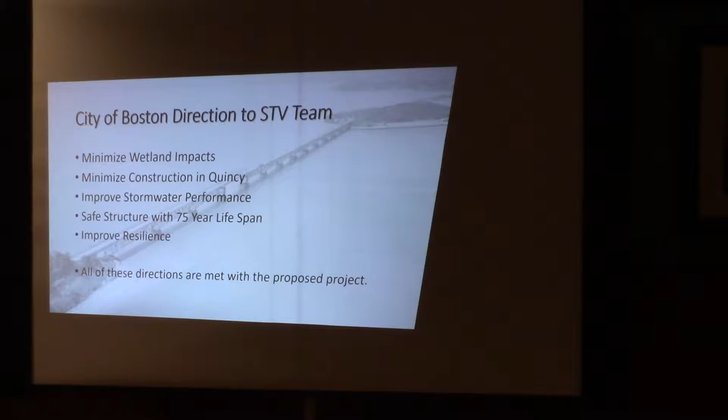So the STV team designed a project that minimizes construction activities that are in Quincy. It provides a new bridge superstructure that has improved stormwater performance relative to the old superstructure, that is going to be safe for 75 years, and is also designed with potential sea level rise and climate adaptation in mind, with higher elevations. We remain confident, as we were when we first presented this to the Commission back in June, that we've met all of these directions.

The superstructure has - we're calling it the same roadway profile. We're using the same piers, and I know that's a subject that has generated an awful lot of interest, and we're looking forward to answering questions that people have. But by using the same piers, we are able to avoid work that is in the water that's going to alter the floor of Boston Harbor.

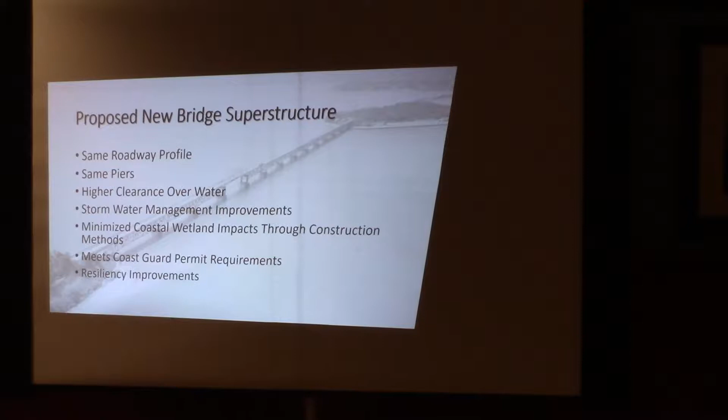The higher clearance, as I said, is to provide climate adaptation and resiliency, stormwater management, and we've also met Coast Guard requirements with respect to the navigation channel, which is on the Boston end of the structure.

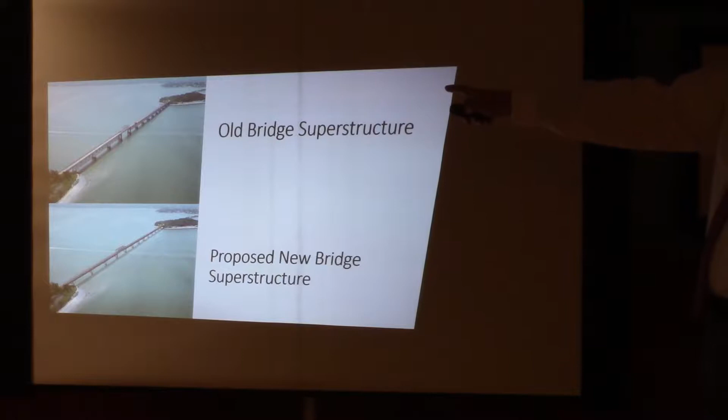The old bridge, people will recall, had a truss, was built about 50 years ago, and as people can see, it had run through its design life and needed to be replaced.

The new proposed superstructure, there's an image down here below, is characterized once again by a truss, the navigation span, and also by new delta frame supports on top of each of the piers.

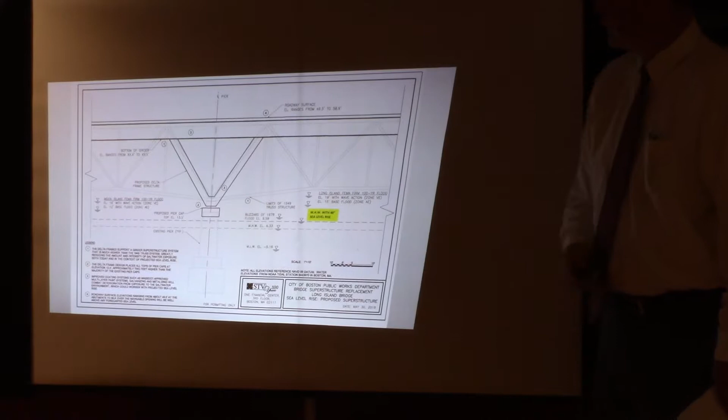This is going to provide a sleeker profile, and once again, the sea level rise is illustrated on this figure, and this shows that the tops of the piers and the road surface itself are elevated relative to the old structure.

With respect to alterations of wetland resource areas or buffers in Quincy on Moon Island, we, as I said, went to great lengths to find a solution that would allow us to minimize temporary or permanent alterations.

They're illustrated on this, which is also in the NOI that was submitted, but down here in the fine print, I regret that it's still fine print even though we're projecting this on the screen here, but the punchline is that what we have proposed is no alteration of land under the ocean. That's a zero, and we continue to stand by that assessment and feel very comfortable in making that assessment.

We have 80 square feet of temporary alteration of coastal beach and land containing shellfish, and that is associated with our proposal to put four pipe piles driven into the coastal beach area to support a temporary trestle, which will facilitate construction of the last span of the bridge. Again, we've minimized the pipe piles that will go in and then be removed with their work.

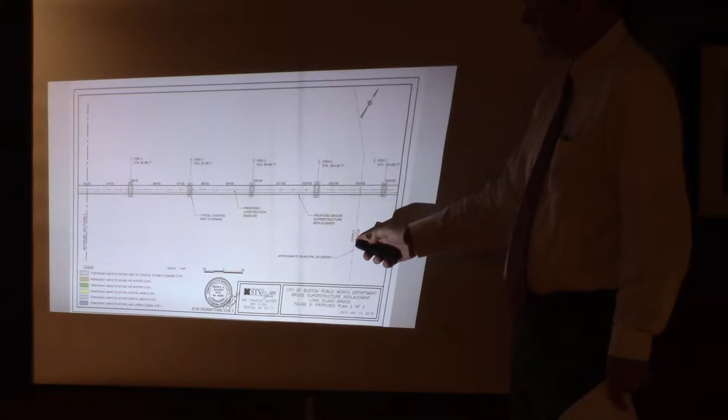And this figure here is the non-intertidal area. This is from the municipal boundary between Quincy and Boston out in the harbor back towards Moon Island. And as you can see, there's no impact in this area that we are proposing.

Once again, we described in the NOI, we've also described in the notice of project change that we submitted to the state, to the MEPA office of the state, that the city is proposing to do repair work to the piers, but the repair work to the piers is going to be in the dry.

It's not going to include cofferdams. It's not going to include activities that are going to alter the floor of the harbor. And through the specifications that will be the basis for the city procuring a contractor to do this work, there will be a requirement that the contractor is not allowed to work in the water and do any activities that impact the floor of the harbor.

He or she is going to be required to use best management practices, structural best management practices, to prevent any debris from being released into the harbor during the repair of the piers.

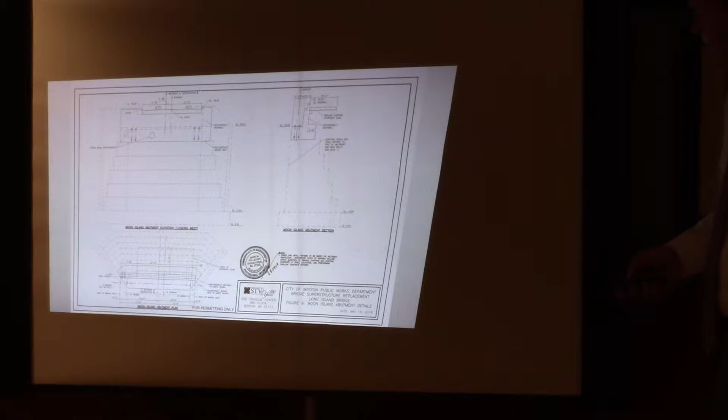So this again is a figure that shows the existing piers, and this shows the repair work that will be proposed. I'll let one of my colleagues speak to the engineering details of that.

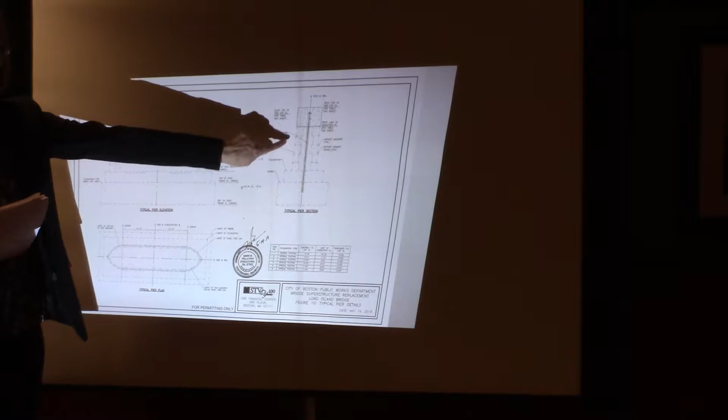You'll see here that we have our proposed limit of demolition. We're taking the top of the pier cap off, installing post-tensioning to strengthen the concrete core of the pier, repointing and repairing the granite facing of the piers, and building a new concrete cap.

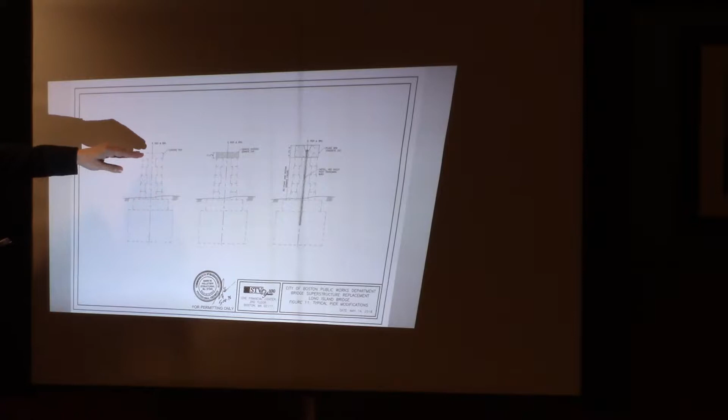This was all included in the notice of intent, but just to clarify everything that's being done, this goes through the staging of what I just described. We take down the top of the existing pier cap, remove the granite from the top, and place a new concrete cap after we have installed these post-tension strengthening rods.

We have included in the NOI a designated area where we would propose for the contractor to be allowed to, during high tide, tie alongside barges to bring equipment over to Moon Island. The concept at this point is that a large piece of equipment, a crane, will be required at this location to facilitate the movement of girders and steel elements of the bridge span into place.

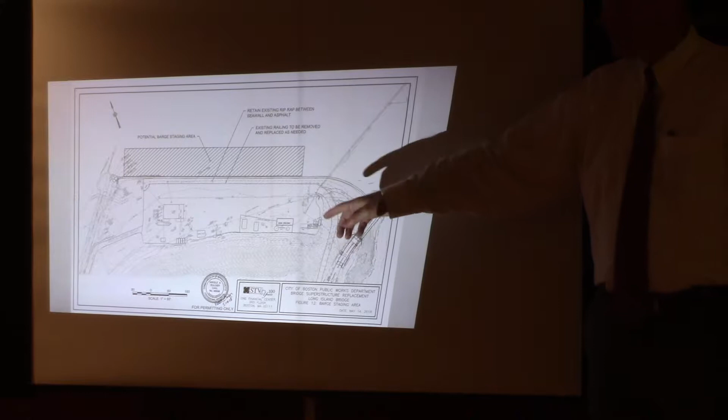We've identified this area as kind of a worst case assessment of where the contractor would be allowed to tie alongside to transship materials or equipment onto the paved parking lot here at the island, and then move it over towards the abutment area, the bridge construction.

We recognize the importance of minimizing the impact on the City of Quincy and minimizing traffic on the city streets of Quincy. We've prepared and presented an approach here that we feel pretty comfortable minimizes that particular potential impact.

The final point I'll make on this, because this is something else that's been raised as a question at various times over the course of the summer, is through the specifications the City of Boston is going to stipulate that the contractor selected to do the work is not allowed to bottom out his barges at that location. I'll say contractors, because the barges they own are valuable pieces of equipment, and they're not really inclined to allow their barges to bottom out in any event because they're concerned about the risk of damage to equipment.

So that's the presentation that we provided last spring. Again, very minor coastal wetland alterations have been proposed in this NOI. We stand by the impact numbers that we presented back in May and initially presented to you in this presentation on June 6th. Once again, no alteration of land under the ocean is proposed in this NOI.

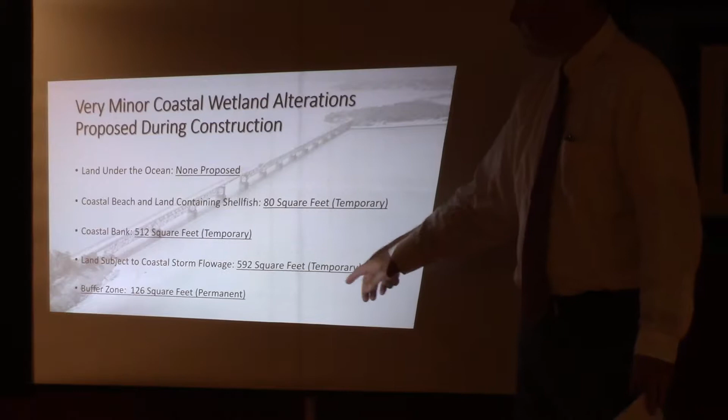Once again, we've in effect double counted 592 square feet of land subject to coastal storm flowage, which is a combination of these two numbers here, because they happen to correspond to land subject to coastal storm flowage.

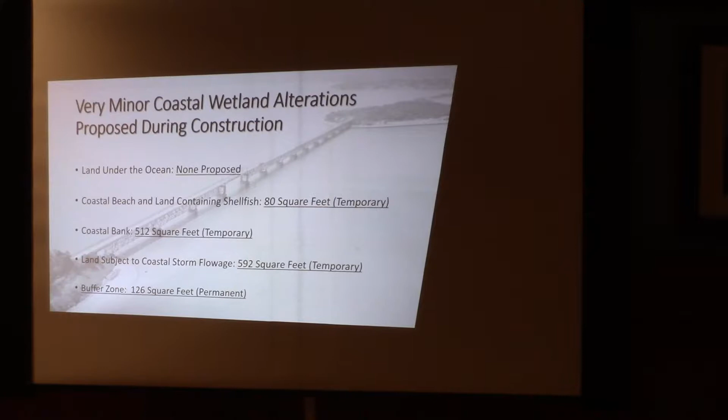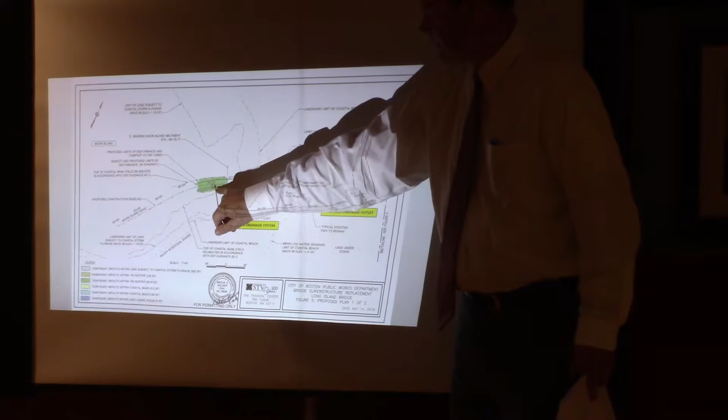And there is a small area where we're proposing this permanent buffer zone alteration up at the abutment area, the approach roadway, which is to improve the geometry of the approach roadway. It's outside of the resource area, in this buffer zone area—you can't even really see it, but it's a little sliver right there because they need to provide safe geometry for two lanes to access the roadway. The pavement needs to be just a touch wider on one side.

Once again, it's buffer zone alterations, and that was intentional. We did everything we could to avoid resource area alterations. So I think that's all the presentation we provided back in June.

And again, as Mr. Osgood said, we're very happy to answer questions. We are hopeful that by the conclusion of tonight's hearing, the members of the commission may be inclined to close the hearing, and we can move forward one way or the other.

I'll just note, I did see in the MEPA file, I raised questions about alternatives analysis, and you did provide some in the MEPA. Not everybody will agree with that, but I did see the no build and ferry service alternatives addressed. Any other questions?

Yes, the most recent one. We'll address that in a minute. He is aware, okay.

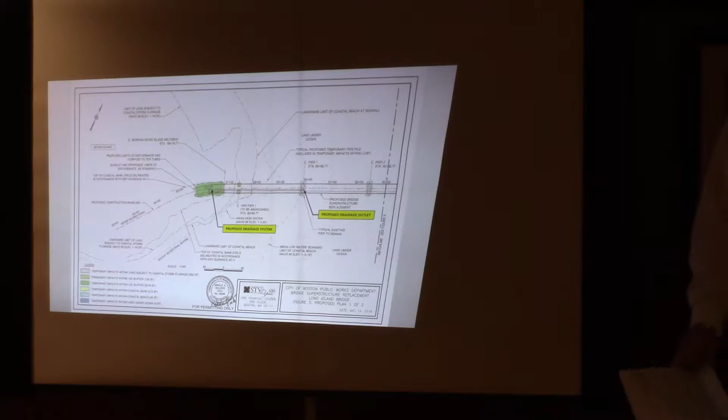I think the other concern I had was the pier repair work. From what I remember, the photographs from June showed there is some deterioration below the water surface, and you're not going to do any work below the water surface. How are you going to address that?

I'll refer that to our colleagues on the team. There will be repair work performed below the water level, but there are structures that can be attached to the pier from the top, a containment structure, so most of that work would be performed at low tide. It's below what we'd call a mean high water line, but some work could be performed in the dry, either by pumping out something attached to the pier itself, not touching the seafloor, or just with the regular tidal fluctuations. There's a large tidal fluctuation out there, as I'm sure you know.

But some of the debris that's in the pointing now, will that end up on the seafloor? No, they'll be required to build a containment system around the pier, attached to the pier, so that the debris would be captured. That, it should be 100%. I would recommend that it be a condition. That's something the commission is likely concerned about, but that's the way the contract documents are being written as well. And that's a temporary containment, not a permanent one? Yes, this would be a temporary construction-related containment system. What's that containment made of? There are different alternatives for that, so we'd consider that the contractor's means and methods, but there are various systems available for that type of thing.

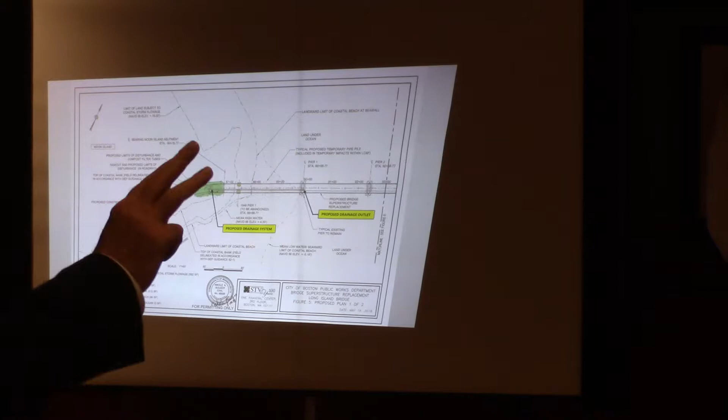Although I did introduce myself way back on June 6th, I'd like to say hello again. My name is John Shea. I'm an environmental lawyer with the firm of Mackie Shea in Boston. I have been practicing wetland law for 36 years, both permitting, appeals, enforcement, and teaching. I've mostly been an applicant and commissioner's lawyer reviewing projects from Truro out to Lenox and everywhere in between. I was chair of a conservation commission for 8 years, so I understand the challenges of the many meetings and complex projects you have to deal with. I'm pleased to be working with the excellent engineers and scientists at Tighe and Bond.

And with extremely knowledgeable city staff who provide a historic perspective on how other projects have been handled, which would be lost if they weren't involved in the process.

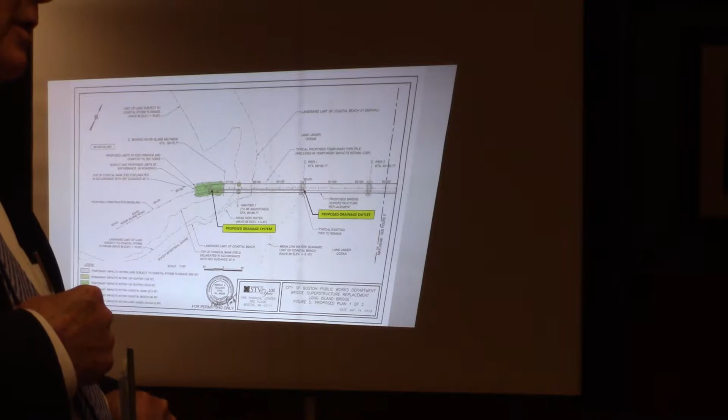Since June 6th, when I last addressed the commission, and when Tighe and Bond and the commission demanded that the Boston Public Works Department submit additional information to you, the city has submitted a package on July 13th, which Tighe and Bond critiqued in its August 21st memo. Dave Murphy will address that in a little more detail.

And the commission also received in yesterday's mail an August 28th letter from the Boston Public Works Department with an attachment. Boston also submitted an evaluation of the condition of the existing concrete piers by Dr. David Gress, and Duncan Malore from Tighe and Bond will summarize the salient points in that memo.

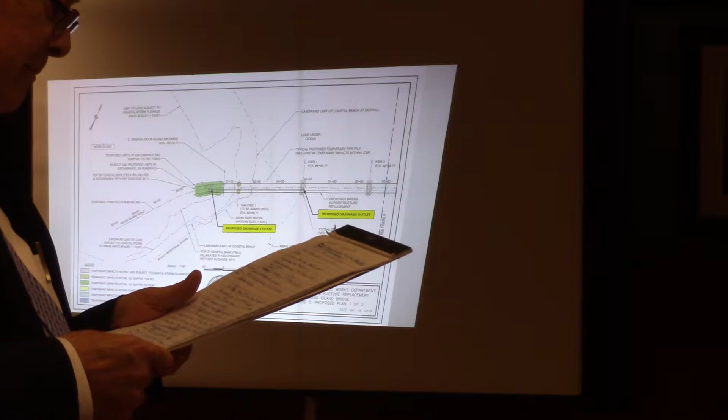I was surprised to hear that there was a September 5th response to that memo submitted. The city's team wasn't provided a copy of that, so we're not in a position to comment on that. But before I turn it over to Dave and Duncan, I feel compelled to respond to the city's repetitive mantra.

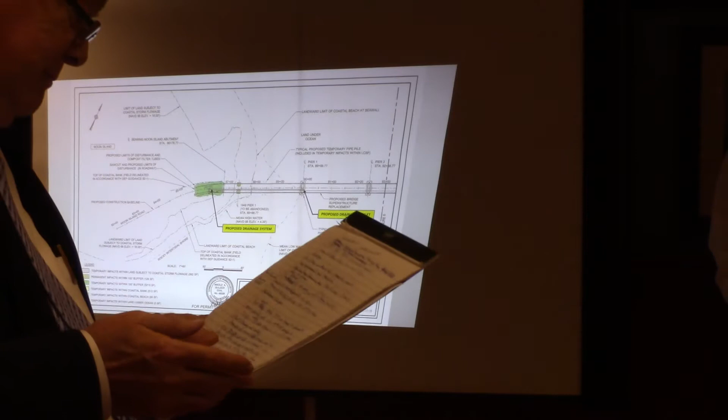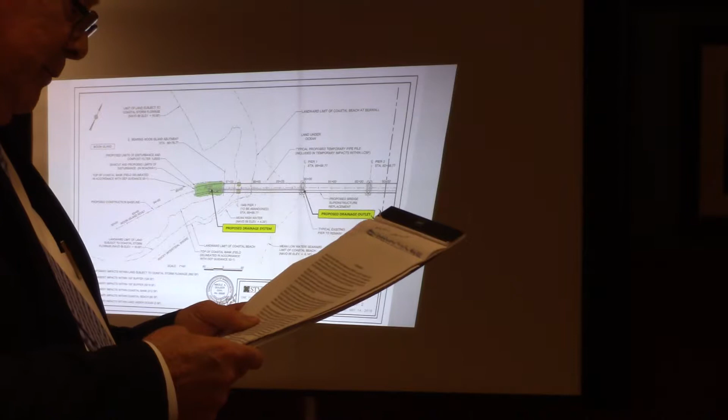In its July 13th letter, Boston claims the Quincy Conservation Commission has no jurisdiction to demand information, which, by the way, Boston provided most of under protest. And its further audacious claim that the Quincy Conservation Commission should not exercise its authority under its ordinance to require, and I quote, information and plans as are deemed necessary by the commission to describe the proposed activities and their effects on the environment. Boston doesn't believe you have the authority to demand that sort of information. That's outrageous.

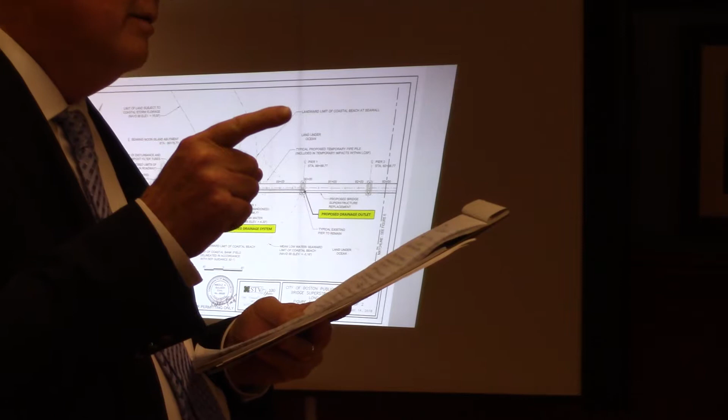The commission should reject the claims that you can't demand additional information that will allow you to fully assess the likely impacts to the wetland resource areas if the piers require more repair, heck, even replacement, if the concrete is not as sound as claimed, without supporting data for that claim.

And Duncan will address that technical memo that addresses that work. You're also entitled to determine what mitigation measures are appropriate and necessary to protect wetland resource areas and wetland interests from the greater repair or replacement of the piers.

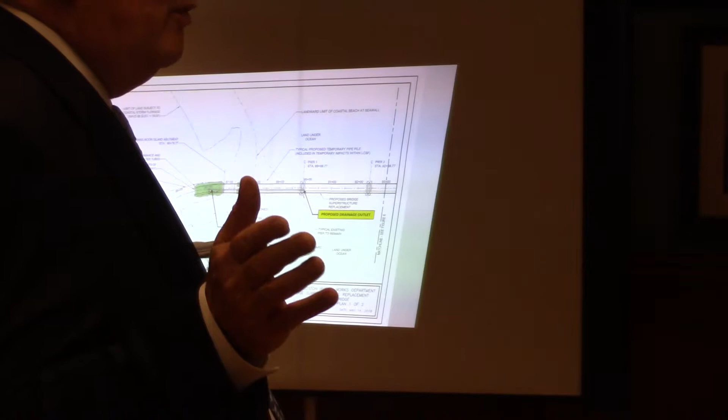The low impact numbers that they're showing you are illusory. They're deliberately low, and they don't acknowledge the fact that there's a lot of work to do on those piers to support the structure that they want to put on it.

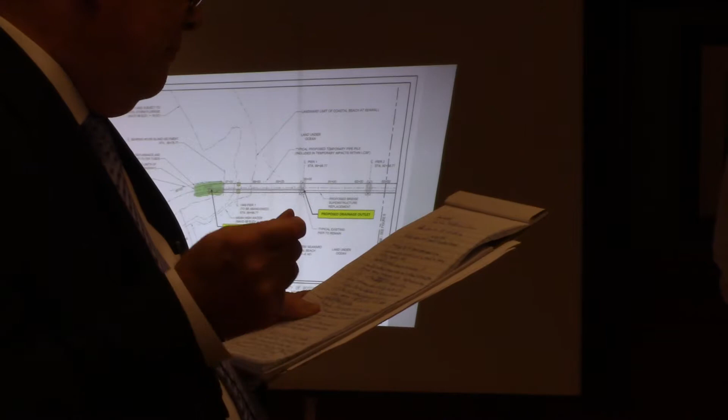In their memo, they criticize your administration of your own wetland ordinance. There's nothing inappropriate with you administering your ordinance more strictly than the Wetlands Protection Act. They don't want you to, because you have more authority. You can be more strict.

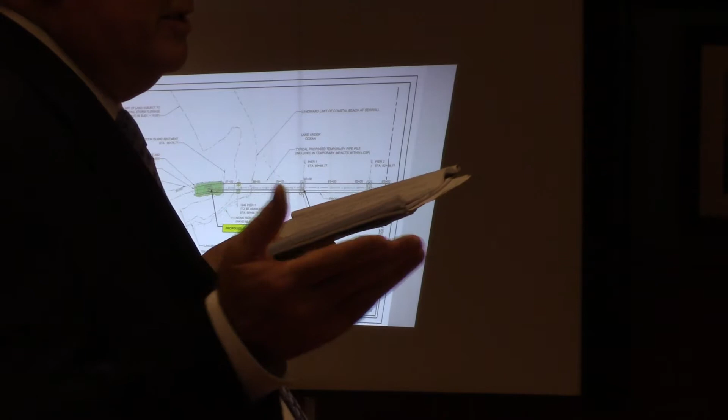In fact, that was the purpose of home rule wetlands laws. Cities and towns were tired of DEP overturning their decisions and second-guessing the judgments made under the Wetlands Protection Act. So 231 cities and towns in Massachusetts either have bylaws or ordinances. You have them. You're entitled to exercise that special authority you have under the ordinance, irrespective of the claim of the city of Boston. Your purview of this project is not limited to the Wetlands Protection Act as they claim.

I thought what was most amazing in the August 28th memo was the admission that the plans before you are going to be superseded as, quote, advanced design and construction plans are prepared. How can you approve a project without seeing the final plans for the project? Trust us, it'll be fine. You should not trust that statement. You should see the final plans now, not later.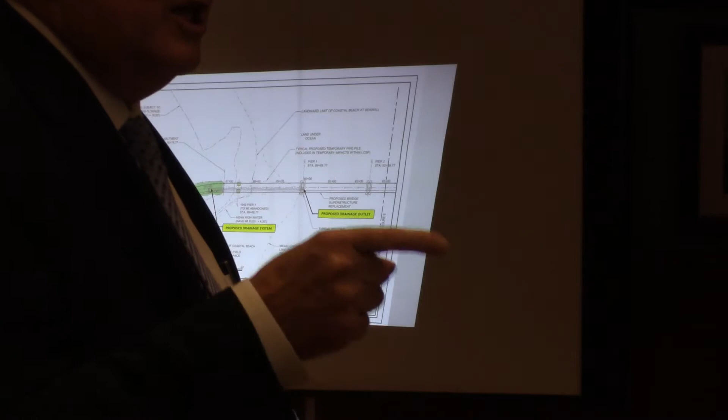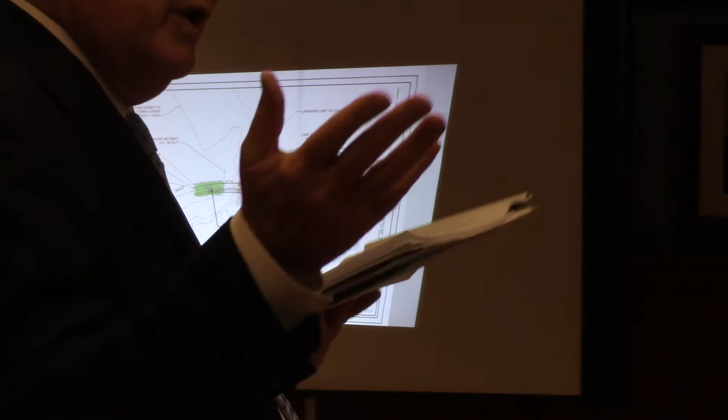The best management practices are exactly what this commission needs to review. You cannot legally defer the appropriateness of best management practices to the City of Boston's contractor. That's your job, not the contractor being paid for by Boston. You need to know, what are these BMPs? What's going to be proposed? Are they going to work? How are they going to work? Should we approve them? Should we require something more? That's your job, not a contractor's job.

I think the audacity of Boston is taken to a new low when, in the package of information they submitted to you, they submitted the Boston Conservation Commission's approval order conditions.

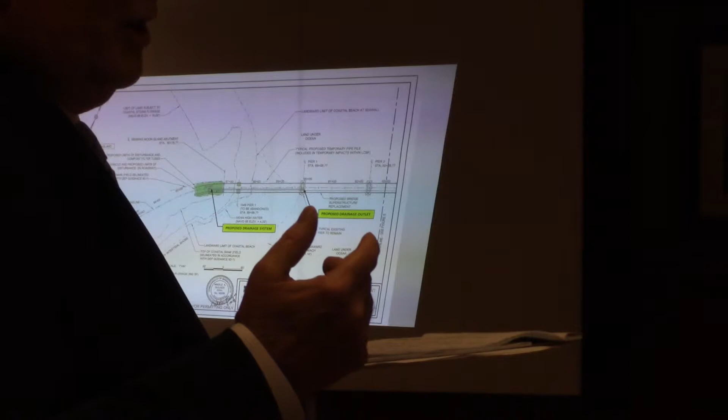I'm going to remind you back on June 6th that the Boston Public Works Department was playing on home turf before the Boston Conservation Commission with a local umpire. In fact, there was a pre-negotiated order of conditions even before the hearing was open, and it was agreed to even before the Tighe & Bond memo that was submitted to the Conservation Commission, the ink had a chance to dry.

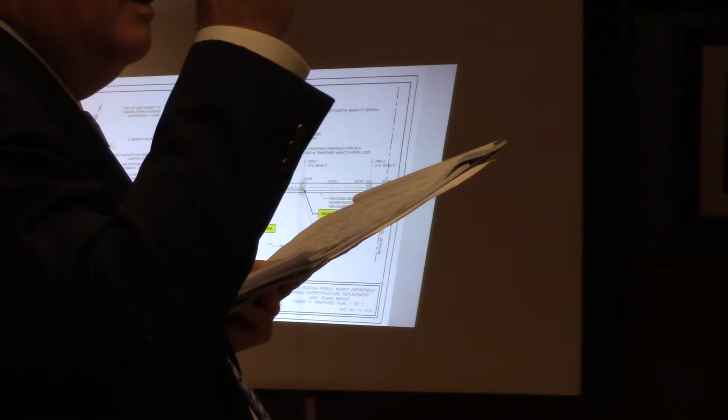There was one brave commissioner, Alice Richmond, one of the finest trial lawyers that I've met in my career. And she said, I cannot, in good conscience, vote to approve this project when I haven't even had time to review the Tighe & Bond memo.

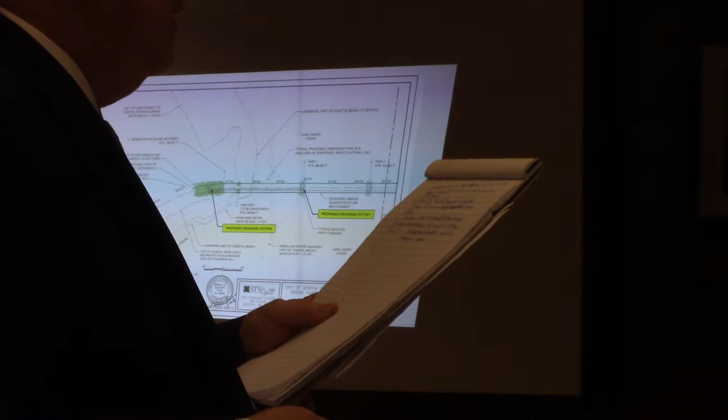But of course, right now, they submitted that order to you, and I gotta tell you, that order's a nullity. It's been appealed to DEP. It means nothing. Shouldn't mean anything to you. You're not bound to follow what the home team did for the home team.

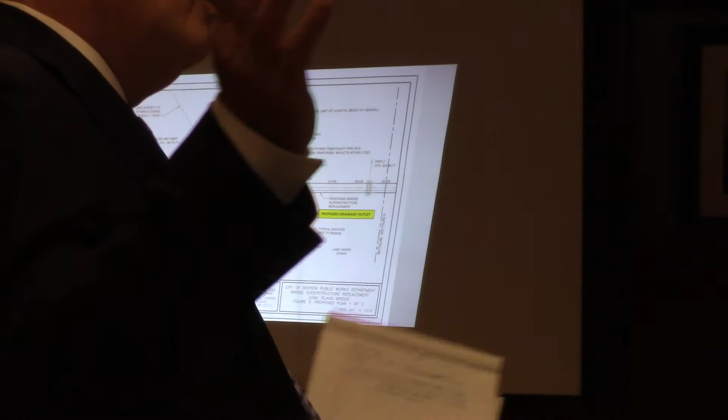So I ask you, after you hear the presentation of Tighe & Bond, to reject this trust-us approach to permitting. If there's a problem, we'll come back before you. You guys ever tried to fix something after it's gone to hell in a handbasket? It ain't easy. People come in kicking and screaming with all sorts of excuses.

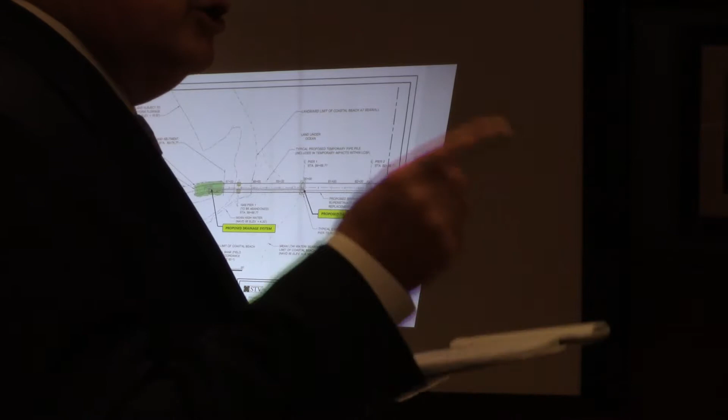That shouldn't fall on you. You shouldn't trust them, and you shouldn't trust an unknown general contractor who's going to come up with methods and means and best management practices. Those are for you to decide whether you like them or not. I ask you to demand the show-me approach before you even consider granting an approval of this project.

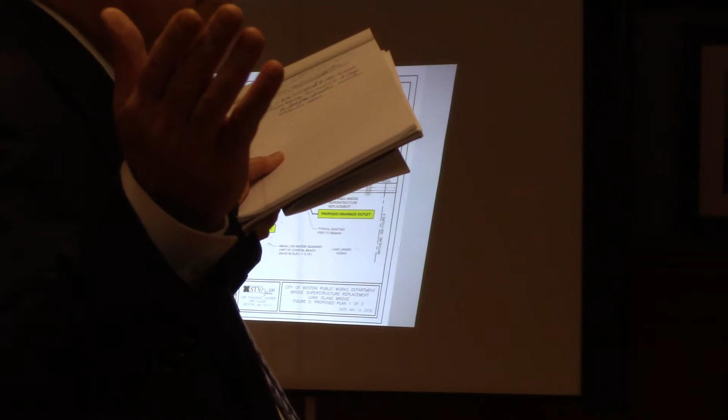However, if the Boston Public Works Department says, this is it, we're not giving you any more information, they refuse to show any more cards, and they want you to close the hearing, do it. And vote to deny the project for failure to provide requested information and for other substantive reasons.

So with that, Dave? If I may, let me just make a correction here. I realize I printed off today a letter from the city, but it was an earlier letter. I don't think you have responded to this, to the September 3rd. Have you? No, there was no September 5th response. No, I printed it off September 5th, so that was. Okay, so there wasn't. There was not yet a response. Right. Thank you.

Thank you very much. My name is David Murphy. I'm a consultant for the city of Quincy, Tighe and Bond, I'm the principal. We have submitted two memos to the commission, one dated June 6th and one dated August 21st. They were very extensive memos. Tonight it doesn't make any sense to go through those in detail. You have those in front of you, they stand on their own.

It's important. I just want to touch on two issues, just to highlight some of them. Attorney Shea has just mentioned one of them: the BMPs. Throughout the document and through the August 28th submittal that the city received yesterday, I believe, it states that the contractor will be responsible, as they get closer to the final design, they'll pass it on to the contractor to submit means and methods for the BMPs.

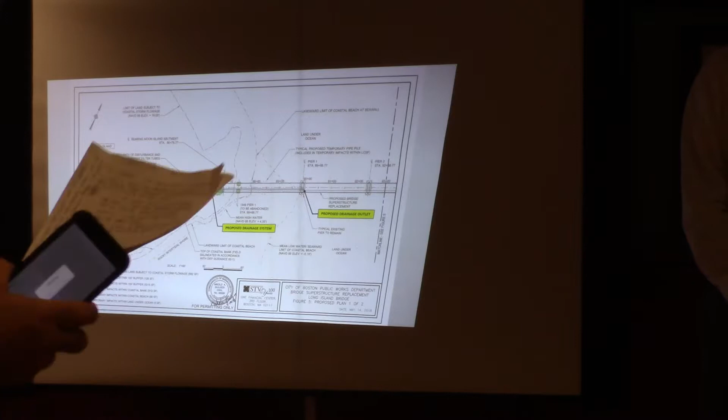The Boston Conservation Commission itself, on their webpage, has a document, and I'll just read a quick paragraph. The City of Boston currently relies on the 2013 report of the Massachusetts Office of Coastal Zone Management Sea Level Rise, Understanding and Applying Trends, blah, blah.

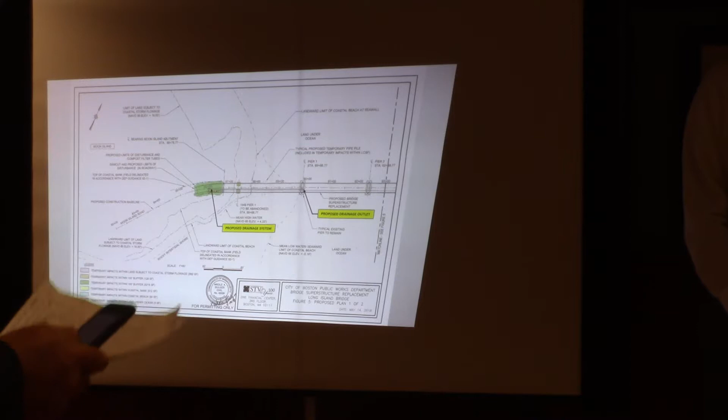The Commission recommends that applicants prepare for at least the CZM intermediate high scenario for most projects, and the highest scenario for critical facilities and infrastructure. We have to believe that this is critical infrastructure to get over to Long Island. The sea level rise that the Boston Conservation Commission recommends that they design for is 6 feet. They've designed for 3 feet. So the bearings of the base of the bridge will be submerged in water, which is not an acceptable design practice.

Tighe and Bond remains concerned, as your consultants, that they've not properly addressed and quantified all the impacts to the resource areas, particularly the piers. So with that, I'd like to introduce Duncan Mello from our firm to go through Dr. Gress's conclusions in his reports that was just given to the city several days ago.

Duncan Mello, Principal Coastal Engineer with Tighe and Bond. I've got over 30 years experience in evaluating waterfront structures, including granite and concrete. David Gress was a member of our team in helping to review the documents that were provided as part of the submission. One of those was a petrographic analysis that was performed on the concrete cores that were taken out of the piers.

Dr. Gress reviewed those reports. There's an Appendix E that was provided with that petrographic analysis. He went through that and came up with different conclusions from what they found in that report.

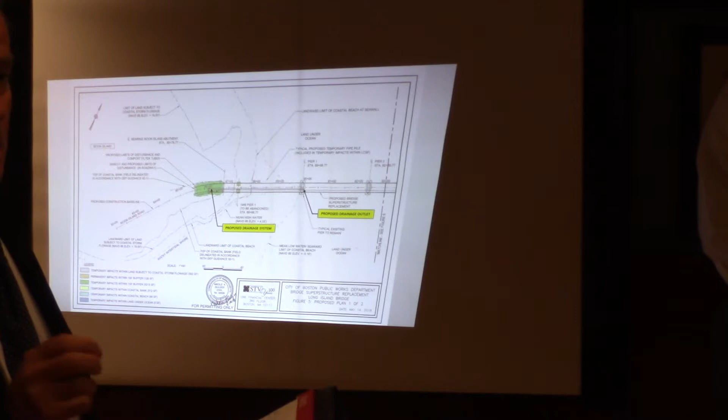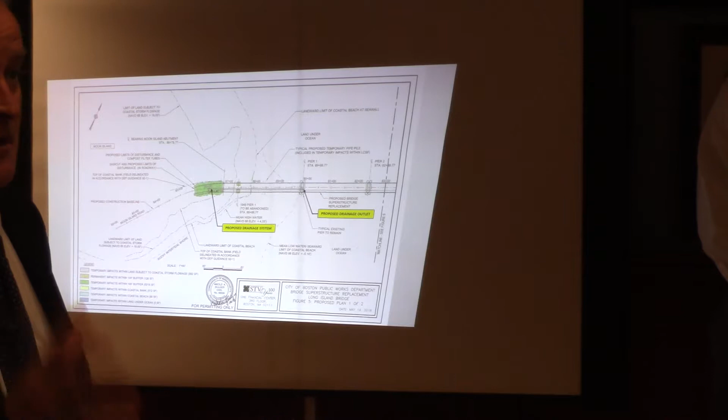One thing he emphasized: the concrete is lacking air entrainment, which are small bubbles that are entrained into modern concrete to give the water in the concrete somewhere to go when it freezes. By not having that, you run the risk of more freeze-thaw damage. In other words, every time the concrete goes through freeze-thaw cycles, you'll get spalling and cracking of the concrete.

They also looked in that study at the chloride concentration, chloride ions in the concrete, and found that they were significantly higher than the levels that would induce corrosion in any steel embedded in that concrete. So the rebar that's embedded in that concrete, and any post-tensioning they put in, would all be subject to corrosion due to the chlorides that have already ingressed into that concrete.

He also reviewed the photographs included in that Appendix E and said that they clearly indicate visually ASR and freeze-thaw damage that's occurred in that concrete. Looking at the photographs of the cores, he emphasized the fact that the cores appear to be more fractured closer to the granite, and more toward the outside of the concrete.

A lot of the testing was done on the portion of the concrete cores taken further on the interior of the pier. It's anticipated that this will be a progressive type of deterioration to the concrete. That deterioration is going to start from the outside, where it's exposed to the water and freeze-thaw most heavily, and progress inward, accelerating over time.

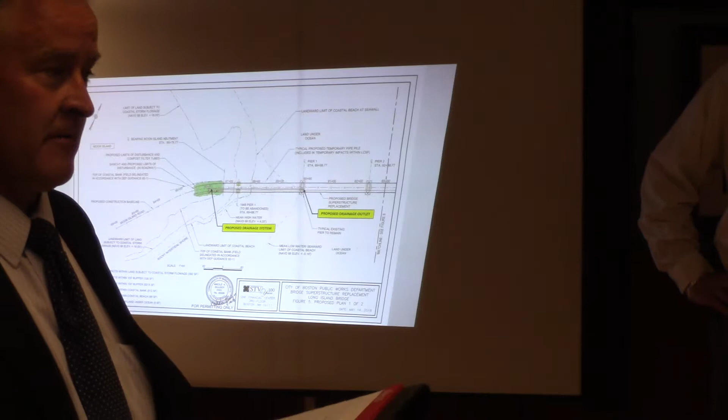Dr. Gress's opinion was that the cost-effective life expectancy of these piers has already expired. They're approximately 70 years old. The city of Boston is looking to get another 75 years out of them, so on the order of a 150-year life they're expecting to get out of this concrete.

It's got both the alkali-silica reaction, which is essentially like a cancer of concrete. It's typically caused by the reactive aggregates, the stones used in the concrete. That's clearly showing up in the photographs in the Appendix E report, with what they call the reaction rings around the aggregate. What happens is when the ASR reaction with that aggregate is exposed to moisture, it starts to expand the concrete, and so you get cracking of the concrete.

The more cracking you get, the more water intrusion you get, and it progresses its way into the concrete of the bridge pier. This is a significant concern, and it's his basis for the opinion that the concrete has already reached the end of its life expectancy.

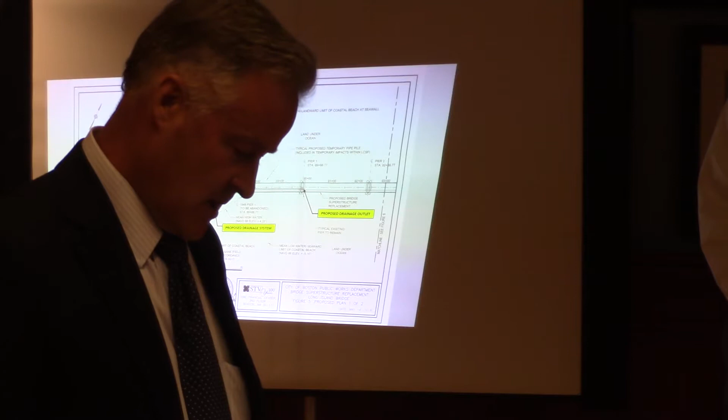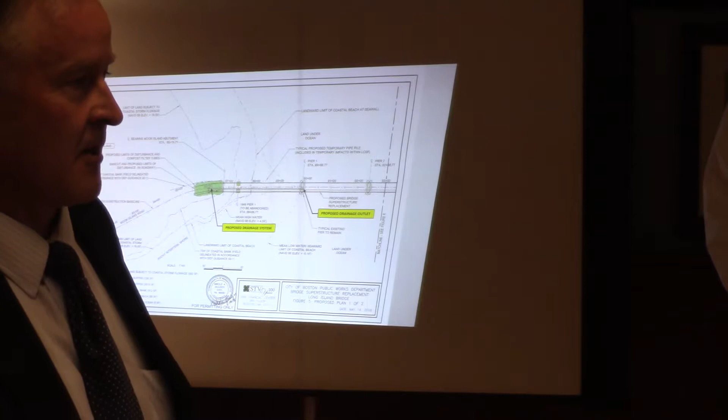He did note that the ASR and the freeze-thaw damage is expected to actually accelerate over time. Again, with that cracking and the ability of water to get inside the concrete of the pier, that reaction, the cracking, the expansion of the concrete is expected to accelerate over time. So you can't just make a linear projection because it's already survived 70 years, that it will last another 75.

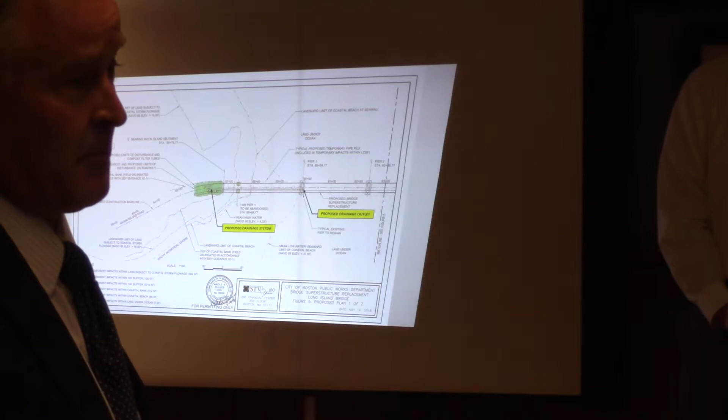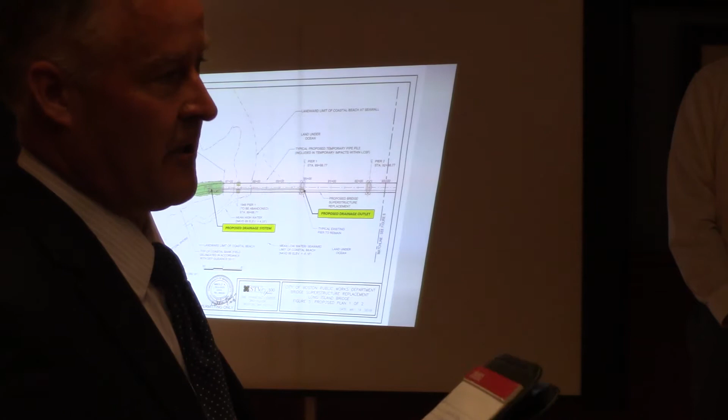At the end of that report, Dr. Gress does make some recommendations for additional testing that he thinks are important, for those piers' reuse, to see what kind of quality that concrete is and whether or not his opinions on this review of the Appendix E report are founded. He recommends more coring of the concrete, more extensive around the pier and in greater depth, and also non-destructive testing to look at delaminations and cracks occurring inside the concrete. So those would be the tests he recommends be done on the piers to make sure they can be reused for the new structure.

Would you like us to respond to that now, or take other testimony? What's your preference? Is there any other testimony from city consultants?

Let's get a response to that, and then we'll ask. I'm assuming that we'll see from our law department who will address some of the jurisdictional issues, and Nicole Bulger will come back on sea level rise and the pier structures.

Thank you, Chief. My name is Sammy Nabolsi, I'm with the City of Boston Law Department, and I just want to address a couple of points that were brought up by John Shea. I won't repeat anything we have in the documents. First I want to clarify the response that the city made.

That was just not a correct reading of the response. If you look, I'll point you to the exact spots, you can read it for yourselves, but it's the August 28th letter, and I think John is pointing at the last paragraph on page 1 of attachment A, where the city said, in addition, we just assert that it is premature to request the advanced design and construction phase means and methods information identified in the memo. And then we actually say that the Quincy Wetlands Protection Ordinance itself only requires information and plans as are deemed necessary by the commission. So we're not telling you that you do not have the ability to request information and plans. We're telling you that the local wetlands ordinance requires us, upon request of the commission, to provide you the plans as we propose the work.

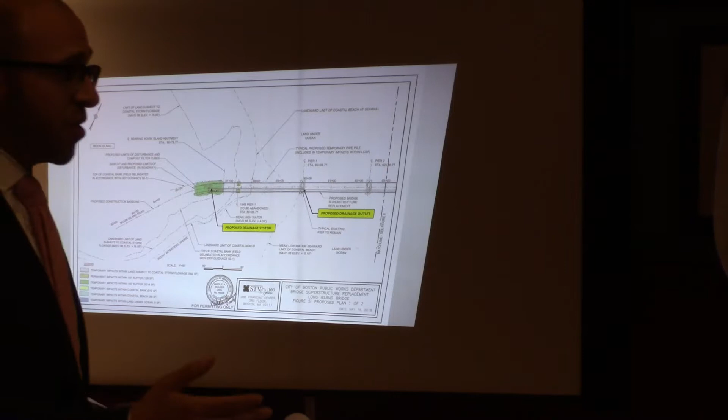The city is not trying to hide the ball or keep anything away from the commission. The fact of the matter is we don't have final plans yet. Why? It's not so that we're asking the Quincy Conservation Commission and the Boston Conservation Commission to rely on our contractor, but we just know, as is the ordinary course in permitting, that as we go to the conservation commissions, as we go through the state permitting procedures, and even here as we go through Coast Guard and Department of Army approvals, there will be additional conditions attached.

And until we know what all the requirements are of the different permitting authorities, then we can prepare a spec sheet and say, hey contractor, not only are these our requirements, but these are also the requirements of the Quincy Conservation Commission in the City of Quincy, the requirements of the Boston Conservation Commission, the requirements of the MEPA office, the requirements of the Department of Environmental Protection, the requirements of Coastal Zone Management, the requirements of Coast Guard, so on and so forth, all of the agencies that we are proposing and showing this project to. And so that's why we don't have final plans for you today, because what you do here today dictates our final plans. And we are happy to provide those to you when we have them.

In fact, one suggestion I would make, and this is what we did with Boston, we're happy to do it here, is that the City of Quincy, as a condition in the order of conditions, require that before the city begins work, we provide the commission with all final plans and designs. And if the commission sees that there's been a change or alteration to an impact area, or our impact areas have increased from what is originally proposed, then yes, we need to appear before the Quincy Conservation Commission on basically what is an amended order of conditions. And we recognize that, and we're prepared to add that to the order of conditions if need be.

The other thing I'll say is that pointing to the impacts that we identified here, it's not, but you have in your presentations, it's actually correct. I agree with John, those are deliberately low. The reason they're deliberately low is because we deliberately designed a project to minimize environmental impacts. Those are accurate numbers. It may be the case that if you add the square footage of the work we're doing on the piers above the water and in the dry, technically there's an increase to square footage.

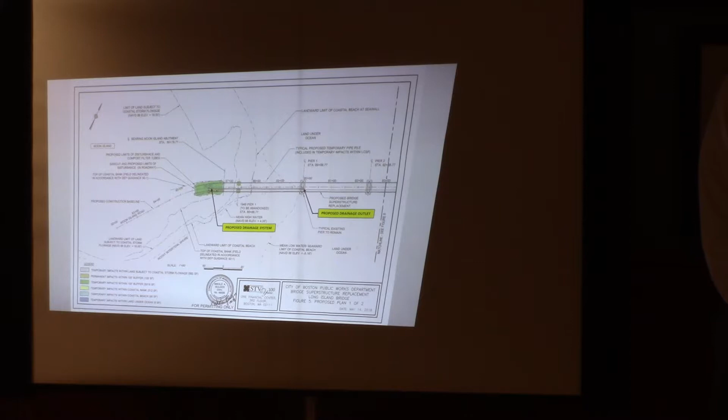And so now I'm going to turn over to Nicole Bulger, who will talk a little bit about the information that we received, I believe, today, and then also address the sea level rise issue as well.

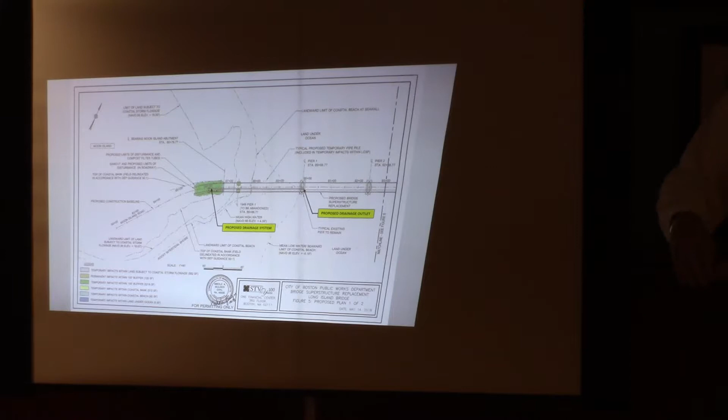I just wanted to quickly touch on the sea level rise question. I know, right, we've all seen how many numbers there are out there for sea level rise forecasts and what percentages. And this actually was discussed, it was discussed with the Boston Conservation Commission as well. It's a very important issue to them. So what we show on this figure is a 40-inch sea level rise.

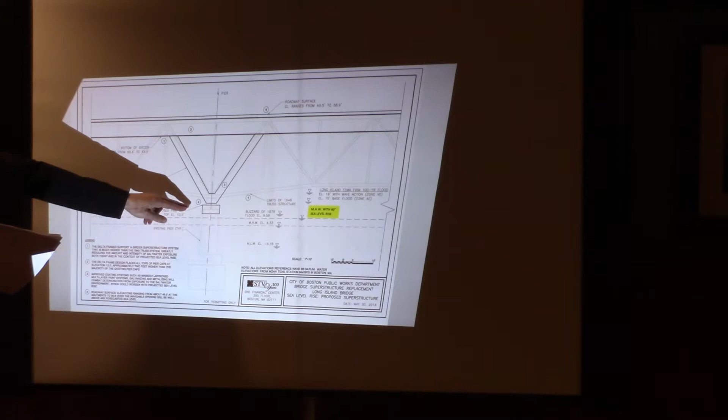If you look at a 72-inch sea level rise, what you see is that this is our roadway elevation. So 40 inches is what's shown here between the existing mean-high water and what would be proposed. That's our 40 inches. So if we double that, you see that really our bearings and our bridge deck are still above that elevation. So it's not something that's going to actually be flooding this roadway and blocking access to critical infrastructure.

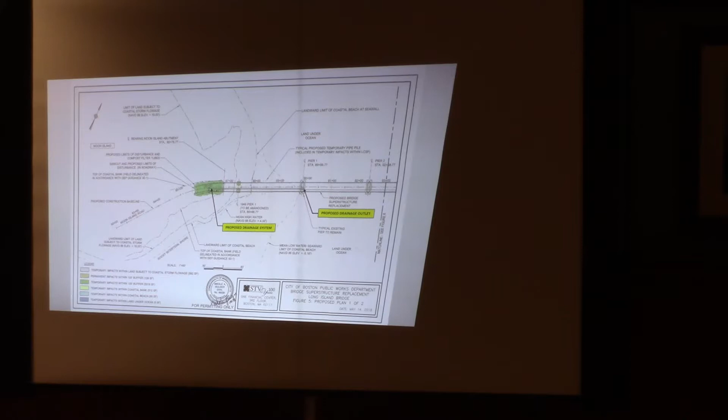And then related to the, I'll take this back. You just heard a lot about the concrete report that we all recently received with an explanation on ASR and chlorides. I think one of the most important points from our perspective is related to the purview of the person who is offering that report and the fact that the design that we described to you for the piers was not included in that. So the city has reviewed the report and specifically the comments related to the structural integrity of the substructures. It should be noted that bridge piers of this age and older are regularly kept in service and rehabilitated for reuse in the Boston area, for example, on Summer Street, and throughout the country.

The items in the report that have merit are addressed by the extensive testing program already performed and by the city's proposed design as presented in the notice of intent filing. Although apparently not reviewed by the report author, the design as presented includes rebuilding and repairing existing abutments, removing existing exposed concrete on piers, repointing and repairing pier granite facing, installing post-tension strengthening bars within the substructure cores, and placing new reinforced concrete pier caps.

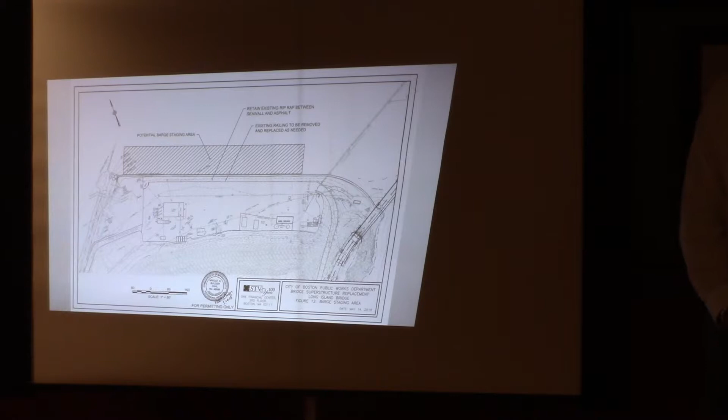The proposed modifications will be in accordance with current codes and standards applicable to bridge design and rehabilitation, and the rehabilitated substructures will serve the community for the proposed 75-year design. And we actually have, at the end of the presentation, we went over these back in June. Other relevant projects, bridges are rehabilitated, substructures are rehabilitated around the country and in this area frequently.

Any other comments? Yeah, it's just a brief statement.

Tighe & Bond never said that the piers were resource areas. They're structures within and above resource areas. That was the point in their memo.

And as to the footprint, way back when, probably June 6th, we explained that the more usual construction methodology around these piers, especially if significant repairs or replacements are needed, was the use of coffer dams. You guys know about coffer dams, you can see them all. Instead, they want to hang bags off the side to catch debris.

The reason we say these numbers are not accurate is that if you take the standard coffer dam design around the circumference of these piers to allow dewatering and to allow the repair to depth, there will be a greater impact to wetland resource areas and to land under water.

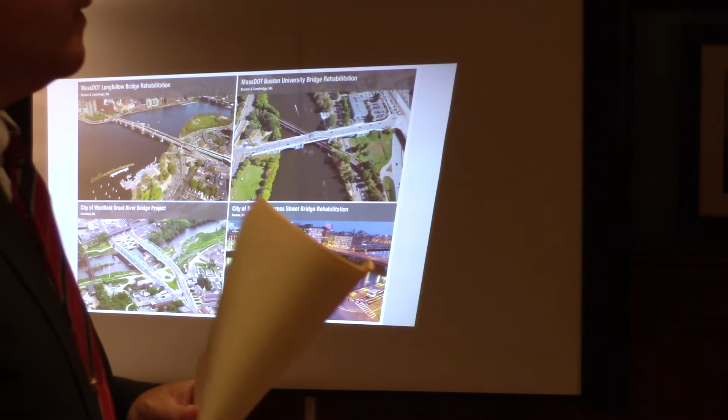Testimony. Go ahead. Good evening. My name's Bill Harris. I'm the Ward 6 City Councilor, and I represent the people who are going to be directly affected if this project goes through.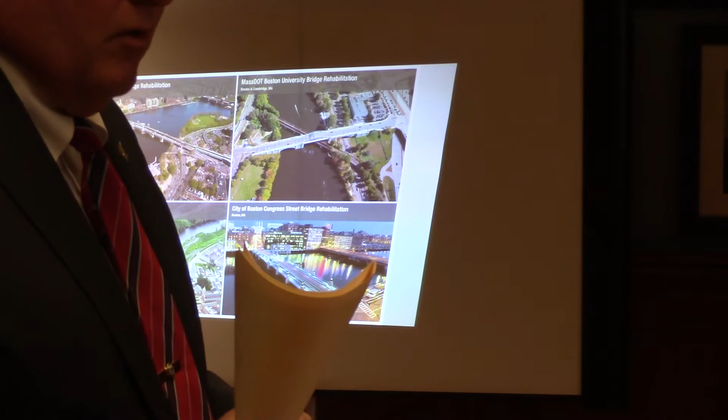I'm really going to make a mistake because I'm going to go off script. I usually prepare myself, but I heard some things tonight that kind of disturbed me. The attorney, I'm sorry I don't know her name, used the phrase, hide the ball. And then the representative for the city also mentioned that there was going to be a recovery center.

So what winds up happening is when someone like myself and other members of government go up against a city like Boston, who's not following the guidelines of what our city does. But I just recently found out that Boston isn't even following their own guidelines when it comes to community meetings and the community that some of the folks represent. They're ignoring what the people are saying.

They don't care about the folks here. They want to use a word, recovery center, and if we go against it, we look like bad guys. My God, we need more recovery centers throughout this country, throughout our city, throughout Boston. They could have recovery centers right now going on. They could have a ferry right now going right out.

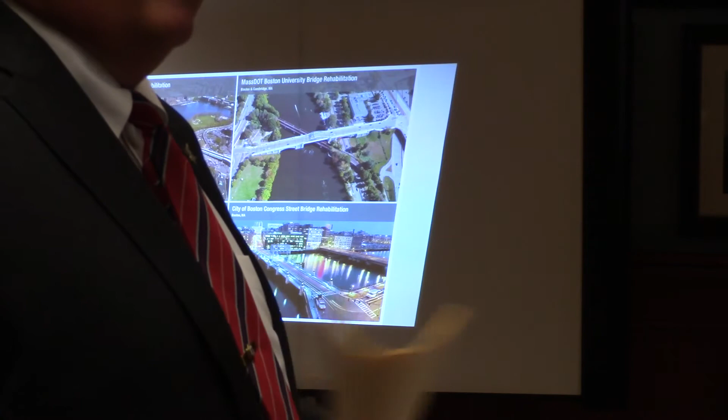I went out to dinner at Spectacle Island. It was wonderful. They boated out 150 people, gave them a clam bake. We had a clam bake, and we were home in 2 hours. So to throw something at a community without telling us what's going to be there, without showing us the plans of what's there, without following what procedures we go through.

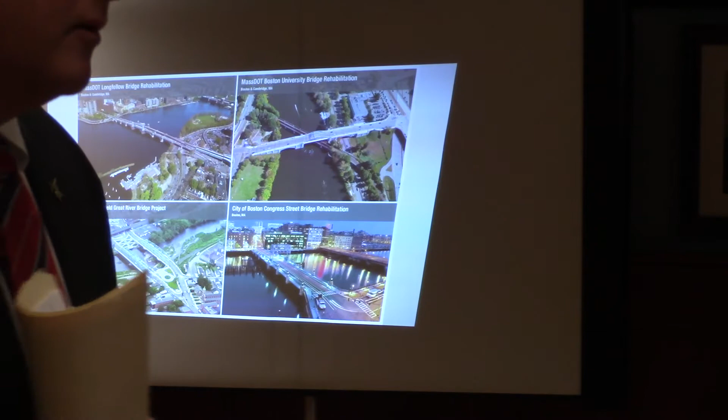Now, I'm going to have some work done on my house. I'm going to have to come possibly in front of you folks, right? That's the rules. We follow the rules. We have community meetings when projects, this is community meetings with this size project.

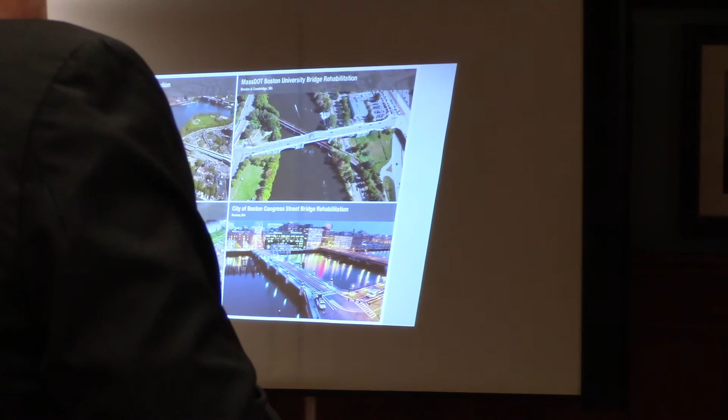And for us being the people of my ward, and not only my ward, the city of Quincy, which will be affected. Not only the city of Quincy, it'll affect the traffic going all the way from Hull over to Boston, which I drive in each day. So, hide the ball, folks, they've hid the ball. And they haven't followed the procedures.

I've written a letter, I got the same response. So I respectfully hope that you folks hear what our attorneys and Tighe & Bond have said, and of course the report, the Gress report, makes it clear.

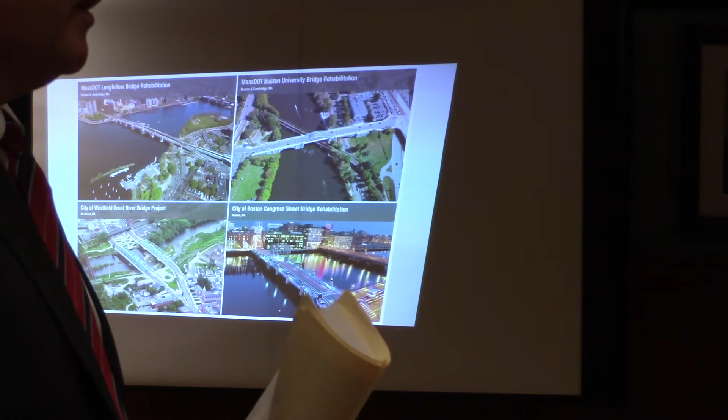And I'm now going to even get myself in more trouble. There's a road which leads, I'd love to see it, which leads, Moon Island Road. I'm going to get myself in a lot of trouble. Moon Island Road has 16 orange barrels. I have photographs of the asphalt of that road. It's about a quarter mile up from the guard shack, which doesn't even come close to where the first pier is.

The asphalt, you know what it's made of, and it's been there forever. It's crumbling into the ocean. You can see exposed, I have a picture, exposed conduit, electrical conduit. Before they can even go to this point, they gotta fix that road. And they have to come before you folks. And you have to protect our environment.

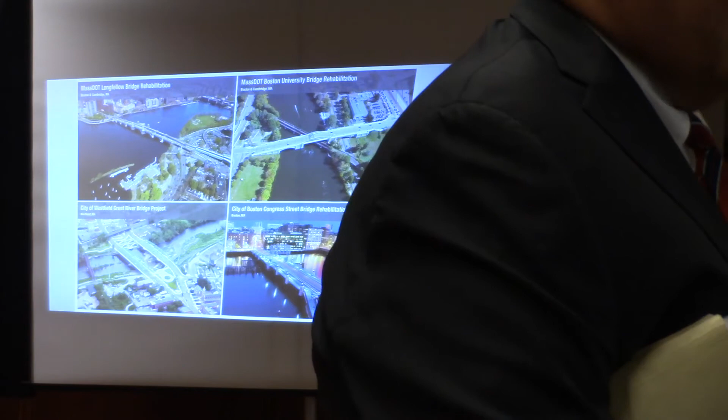Please, the young lady spoke about making sure containment. Right now, they're not containing Moon Island Road. Asphalt is falling in as trucks and vehicles go to Moon Island as we speak.

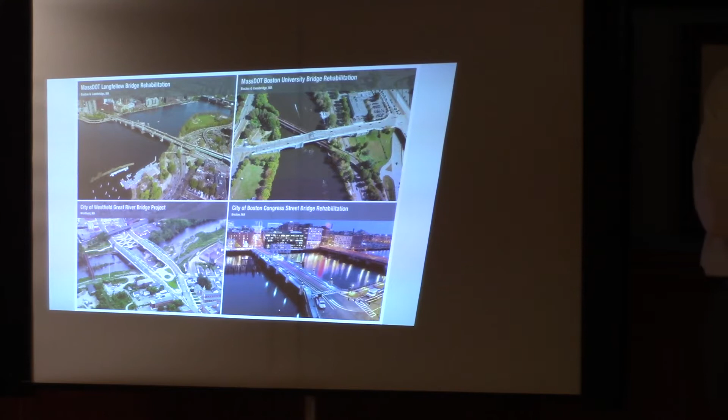My concern from the first June hearing was the alternatives analysis — whether we agree with it or not isn't really our jurisdiction — but the pier deterioration and whether it's adequately addressed in terms of what's going on with those piers, and whether we're going to have temporary protective structures if there's below-the-water repair, or coffer dams, which would have no impact. What concerns are there?

Well, they have information they have that the city doesn't, is that correct? According to the Gress report, he's requesting additional testing in addressing this. You've only just received it. If it's useful though, the team can speak to the accredited testing that's already been done and the source of that testing — that would be useful for you to address that.

So many of the statements in the Gress report — William Goulet, G-O-U-L-E-T — we reviewed the report Gress was provided to us via Tighe & Bond. What we had provided in our structures report, which is part of what he reviewed, and what he listed in documents, wasn't our full structures report. It did not include our proposed alterations. A good portion of the concrete he refers to as exposed concrete is being demolished and replaced.

Some parts of that report he goes into depth on, the Tetra Tech analysis — all of the test results put into our report that he reviewed are from an accredited AASHTO testing facility, an independent facility. They classified all the ASR as minor, with no degradation to the structural capacity of the concrete. So there can be further discussion between us and them, but we've provided substantial testing run through an accredited facility by AASHTO, which controls bridge design here in the state and across the nation. So in that regard, we don't see all the points he's made as valid.

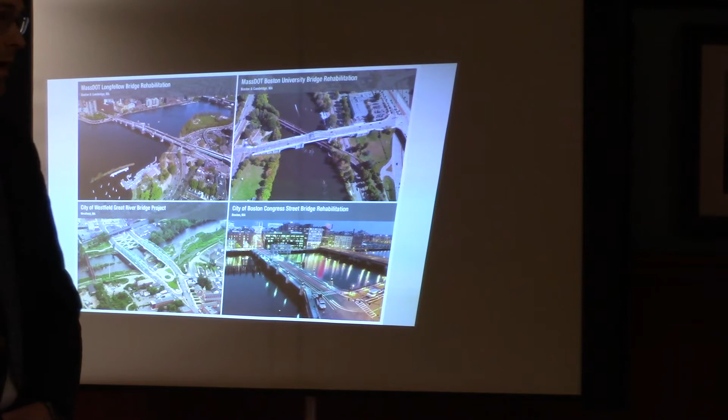We're just going to say this is the results that we provided that he reviewed. They're from an accredited association, controlled and accredited by AASHTO. That is what standard practice would give you as a result. That would be our response to the questions he's raising.

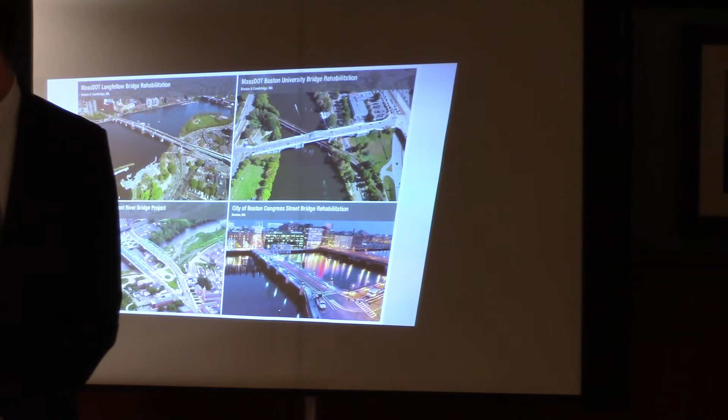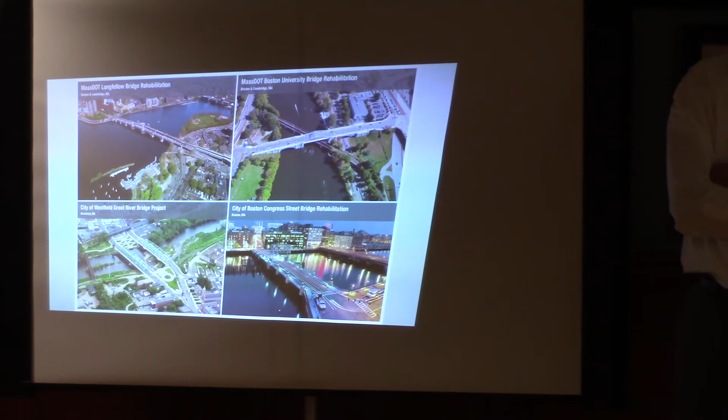Chairman, it would actually be helpful to know a bit more about the interest here. In that report, we disagree with it, and testing documentation has been provided. It's really about the existing piers and the type of reactions happening with the salt water in the area. Obviously, the proposed work isn't happening in the water, it's all happening in the dry, which resolves those issues as proposed, and that's part of our notice of intent.

So what we're curious about is, from the Quincy Conservation Commission's perspective, whether it be the local ordinance or the state act, how are the concerns raised in that memo tied to work being done in a resource area?

I think we're concerned about the future of that resource area. If these structures aren't structurally sound, or if these bridges will only last 10 years because of the degradation of the concrete, it's something we're going to have to deal with 10 years down the road, not 70 years like you're hoping.

I understand. Is your concern that we are going to be back here in 10 years trying to build a new bridge, or is your concern about protecting the resource area? Right, but how is it being harmed?

It's the potential for it to be harmed. If these deteriorate quicker than you project, then there will be deterioration into the resource area, and there'll have to be more work done.

You're worried about, in the future, pieces falling off the piers, or redoing these piers entirely, which then gets into the seabed area. Things you're trying to minimize now, you may make worse by not correcting these problems. I'm not the engineer, but I think that's a legitimate concern of ours — you're balancing something by not doing new piers now, saying that'll be less impact, but if they have to be new piers in 10 years, then you increase the impact. Is that a fair way to say it?

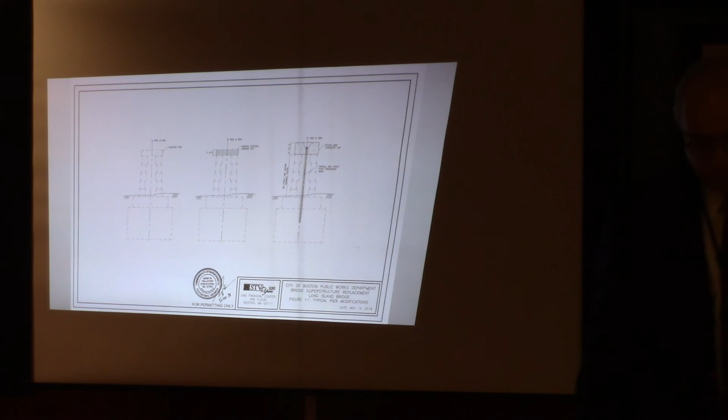Well, I think that can be addressed in the response. We don't have to delay it today. But at this point, Mr. Chairman, if I may. For the record, Jay Duker, I'm the Director of Inspectional Services. As your conservation agent, I make a recommendation that you close the public hearing tonight and vote it down for lack of information. Thank you.

What is the board's... They're demanding a vote within 21 days, and objecting to our continuance. But again, we reiterate our willingness to provide answers to your specific questions after this. But are you objecting to a continuance? That's correct. I think we have to take a vote.

Yes, close the hearing. Okay, we take a vote to close the hearing, and the basic thing is to close the hearing and issue negative order conditions, for lack of information and detail, and substantive concerns about the structures. Okay, all right, was there a second? I make a motion. Second. All in favor? Aye. Okay, that starts the process.

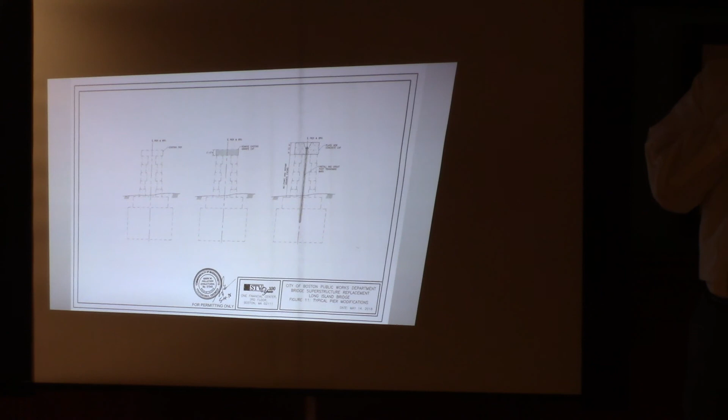Thank you. And to clarify, that's under both state and local wetlands ordinance? Yes. Okay, thank you. Thank you.